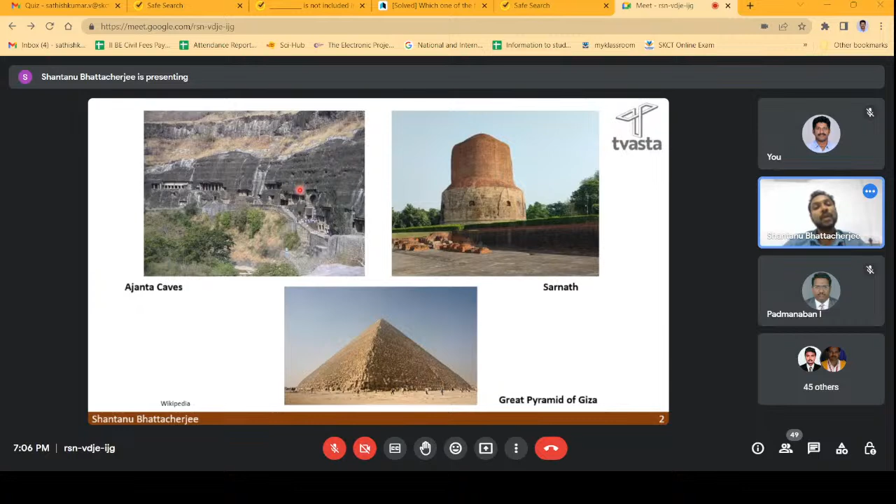The main concept which differs Ajanta caves from Sarnath or the Great Pyramid of Giza is that in Ajanta caves you have to get the materials out from the cave. We can also compare this with something present in Tamil Nadu, the caves in Mahabalipuram, the same kind of thing where stones have been carved out and sculptures were made.

Then comes a very interesting question: how were these great structures constructed at a time when there were no machines or very little energy available? There were different methods used, and interestingly, the scaffoldings, the formworks, and the way ropes and pulley systems worked for RCC or normal construction methods today were still existing when the pyramids were constructed. So basically, the core of stones and the formwork system is still the same in practice as when the pyramids were made.

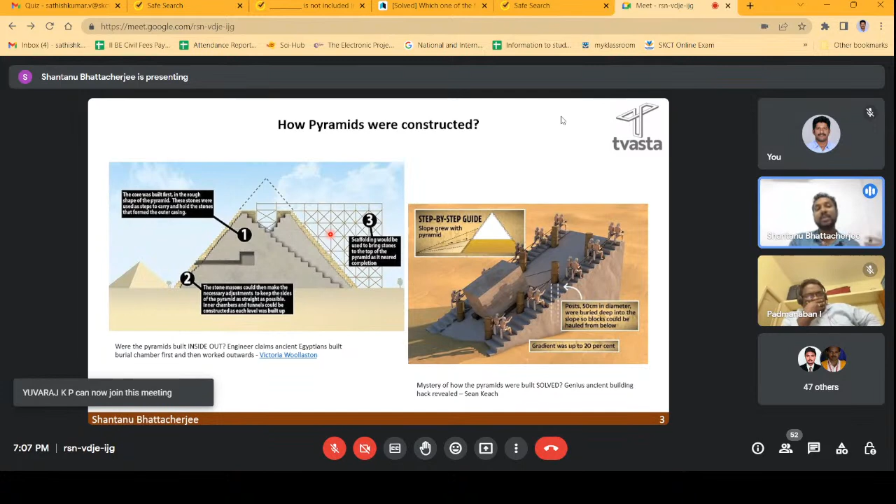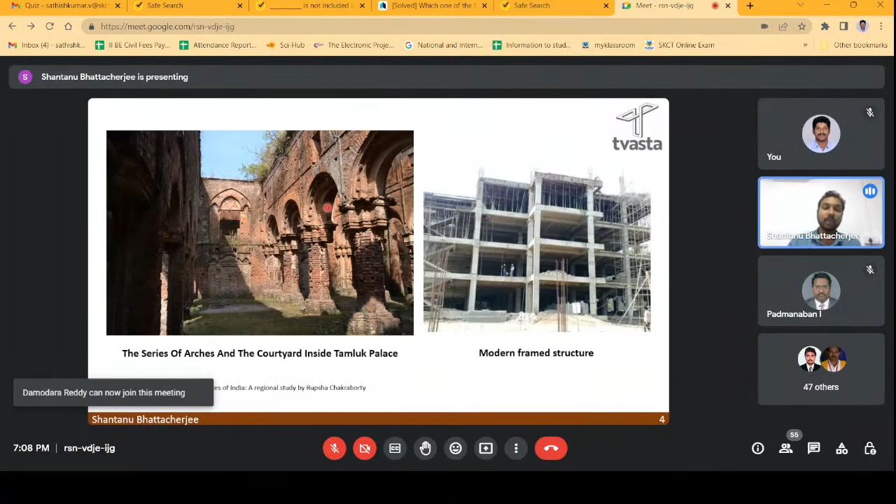Then we'll show some interesting things, like how the structural system changed when we went towards having arches - the brick arches, the brick masonry constructions, where RCC was not yet a part, and we still used to make good mansions and good houses with only bricks and blocks, using geometry and structural engineering as part of it.

Then we came to the era of modern frame structures, where we started making beams, slabs, columns, and RCC, and the whole construction scenario changed. Now we could make taller, wider, bigger houses using the modern frame structure. But one thing remained the same - what was there at the time of the ancient pyramid of Giza is still the same. We still had the formworks, we still had the scaffoldings, and nothing changed the way construction used to happen.

I'm not saying the machines were new that came to construction - there were new ways to do construction. But the scaffoldings, the formwork system, the basic skeleton was exactly the same. And there comes the most interesting part.

How much formwork is actually needed for construction? So the formworks that we make - interestingly, 20% of the total cost goes for formwork material cost, and 34% of the total construction cost goes for formwork labor cost. Only 46% is for the concrete, rebar, footing, placement of concrete and such things. So a total of 54% of the cost is taken just for formwork material cost and formwork labor cost.

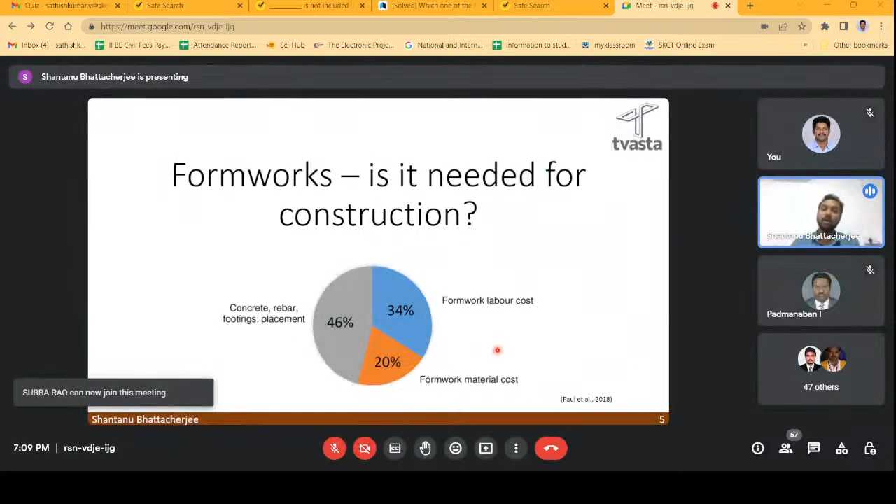And one thing we can't count here is the time. You need 1, 2 or 3 man-days to create the scaffoldings and formworks, and then another 2-3 days to remove the whole thing after the concrete gets set. So the stripping of the formwork again takes a longer time and is longer, labor-intensive work.

For removing that, some technologies came into play. One is conventional shuttering has moved to Mivan technology, where you have the whole shuttering together and then you just put concrete inside it. That's how the conventional system has been changed a bit into another formwork system that can work well.

But there is a chance where 3D printing gets in. 3D printing talks about no formwork construction - meaning while having the structural systems integrated into the building itself, we want to move away from needing formwork and scaffoldings to construct. It might be 100% removal, or even 80 to 90% removal of the total formwork and scaffoldings while the construction is happening in situ, not precast only. There's a difference - in precast, you just have to move the molds and put it there, but for 3D printing we don't need that.

So we'll glimpse a small talk about what is automation in construction. I hope my animation is visible there. Yes sir, visible, sir.

This is the next era of construction. So when we talk about Tvasta, when we talk about BTCM, Building Technology and Construction Management of IIT Madras, what we are actually looking at is changing the construction scenario - something that hasn't been worked upon for a long time, and how disruptive the industry can be. And how interesting it can be for people who think civil engineering is the same old boring stuff. No, we are not in the same old boring stuff - we are trying to make our construction smarter, faster, efficient, and use a lot of modern technologies.

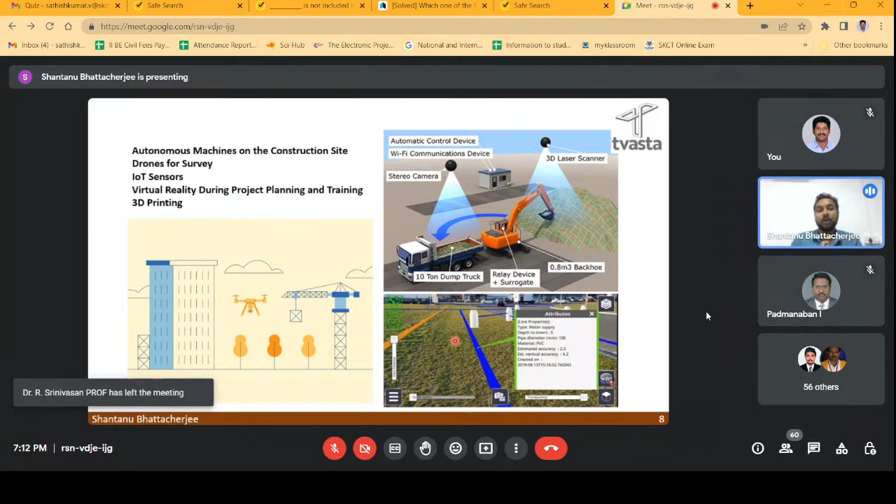And the end comes 3D printing. How is it all together, how can we talk about it? I'll go to a very famous diagram by BCG analysis - it talks about what the future holds for construction. So this is what we have.

We start the life cycle from planning to operations, and what we have is basically four major things which are going to change construction forever. One is user interfaces and applications - we've been talking about big data and analytics, simulation and virtual reality, mobility and augmented reality. All these things are in labs and somewhere in practice, and again these all come where users can see the buildings better without having to construct them. Then we have BIM and ubiquitous connectivity and tracking systems that help us track or manage the things.

Then comes the next most important part, the digital and physical integration layer. For making a car, you have robots. For making even textile, you have robots. But for construction, you don't have robots. That's where additive manufacturing actually gets in, where 3D printing actually gets in - it's also called additive manufacturing in other terms.

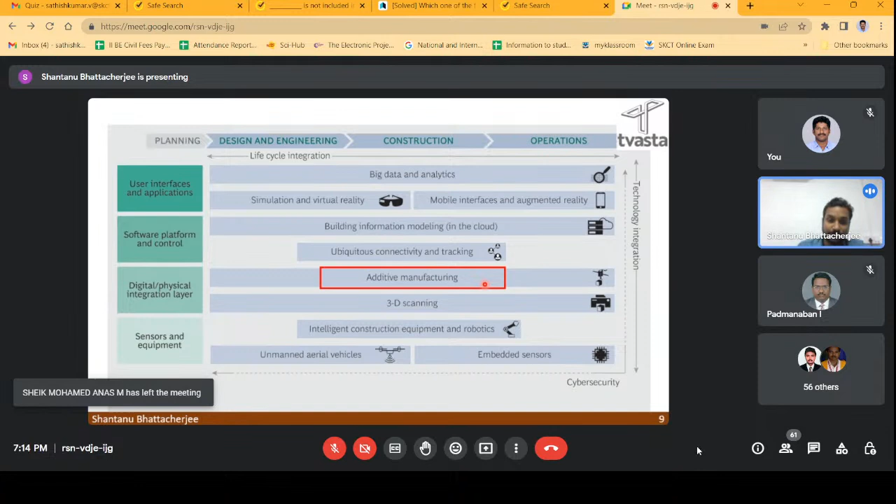Robots are getting into construction, and we are integrating a lot of software systems, a lot of high-tech trends to create houses. So intelligent construction robotics with sensors and all these things are getting added.

So this was just a starting introduction on how concrete 3D printing developed and why it is important. Now I will talk about what concrete 3D printing is and what we have done, and then we'll go into some material related technical stuff.

First, a simple difference between additive manufacturing and subtractive manufacturing. In subtractive manufacturing, you take a material, subtract from it, and create an object. In additive, you take the binder system, add it together, and create an object. So the main benefit is that waste can be reduced a lot.

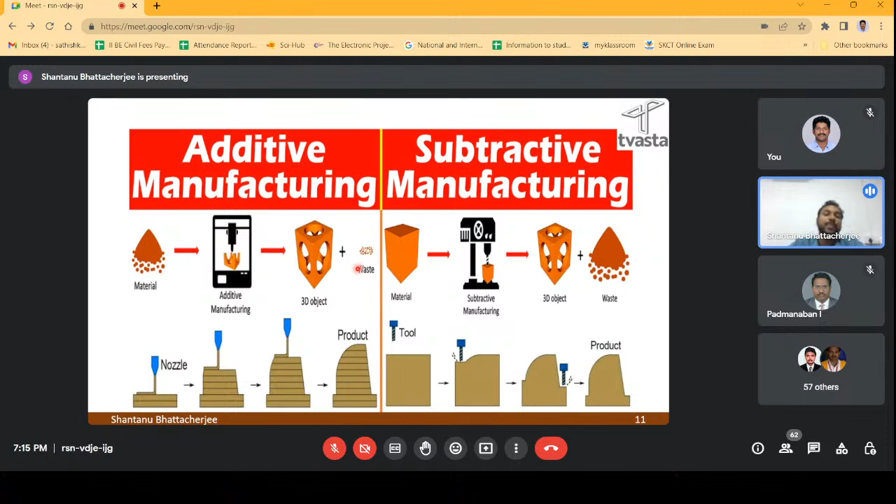So you will say, okay, this has been done in the civil industry for a long time, correct? For blocks, for bricks, for other things, we have been doing it for a long time using molds. And there comes the change.

How concrete 3D printing happens is that we have a robot running and creating layer by layer construction of wall systems, columns, walls, and other systems, and you don't need formwork at all — it just comes up together. So that's how the actual printing happens. It's a primitive process.

When we started, we had this kind of printer, and there are four main parameters which become critical for governing the 3D printing. 3D printing is like a micro factory, so you have the automation or automatic control of the robotic machine which runs through the process.

You have pumpability, or a pumping system which needs to pump the material to the hopper or the auger system. You need to extrude it, like the extrusion system used for brick manufacturing, cold bricks and similar things. Then it needs to build in that fresh state to enough height so it doesn't collapse, buckle out, or bulge out.

There comes the most interesting part. We have been habituated to create self-compacting concrete, habituated to create pumping concrete, but always with formwork. We put the concrete in the formwork, forget about it, come back after 1 day for a column or 7 days for other things, strip the formwork out, and our concrete is ready inside.

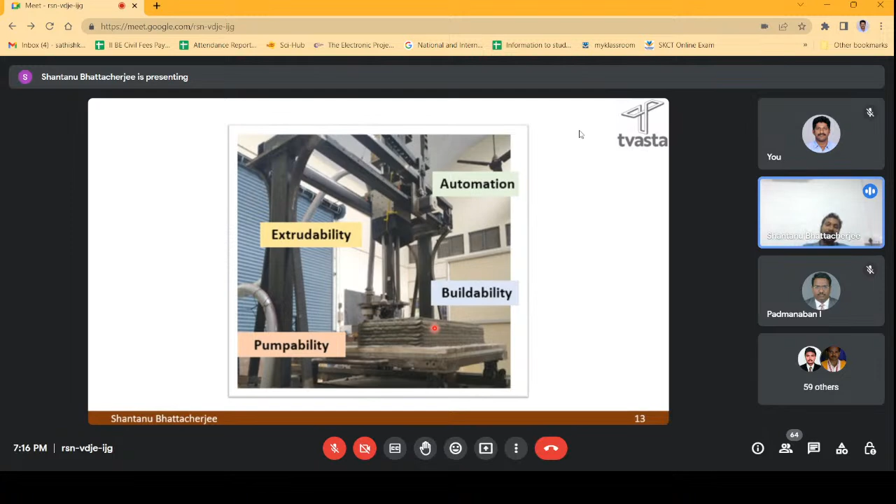The mold was there. But here, the concrete has to stand from day zero, from hour zero. The moment it starts printing, it has to stand there and it cannot collapse. That's where the change actually starts. So how does this happen?

There are different other forms of 3D printing also. This is called smart dynamic casting, where again you have a mold and the concrete has to stand on its own on the column while it is getting printed.

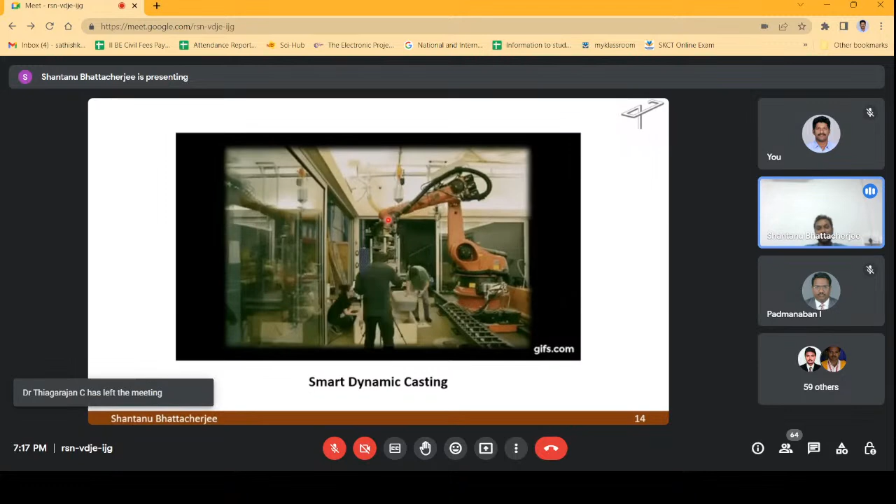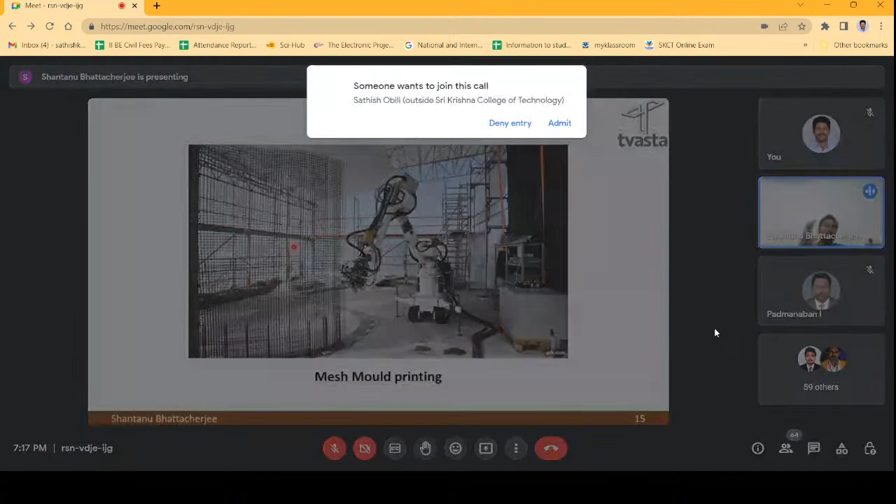There's another quite famous approach called mesh mold printing, where you create the reinforcement using robots and then shotcrete the concrete inside like a ferro concrete or ferro cement, and then a robot comes and does the final finishing.

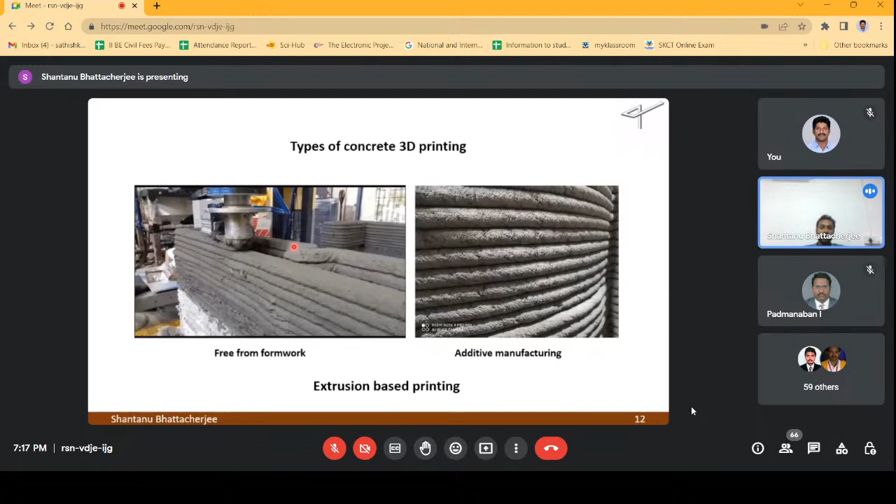Out of all this, the extrusion based system is the most famous and is being used for large scale production, while others are still at lab scale. So we come to what exactly is being printed.

These are 3D printed structures. This is the first 3D printed house of India, the first finished 3D printed house, which is in IIT Madras. It was done in 21 days, and it was more like a students and startup project where people were not equipped enough. So now we can have this in 7 to 8 days, we can achieve this scale of construction.

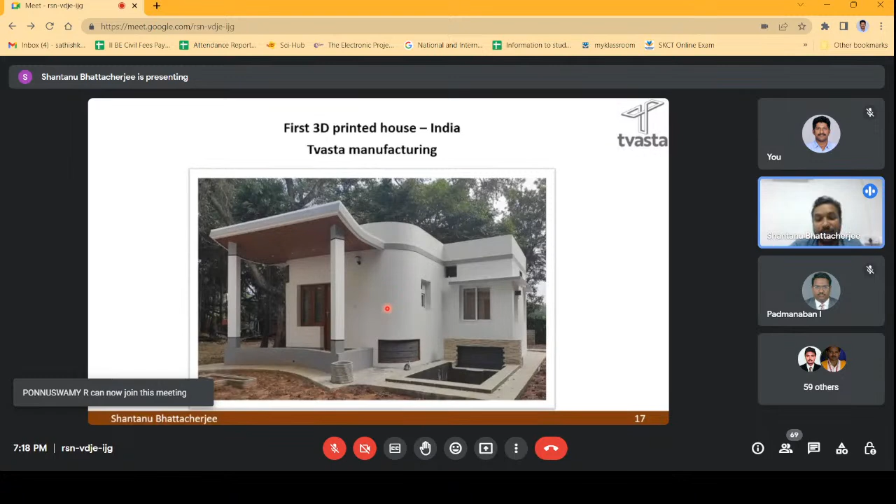It was done off-site, in factories, printed and moved to the site, assembled and finished. Similarly, L&T has also constructed 2 houses in Kanchipuram using 3D printing. The only thing is that the technology Tvasta has is completely made in India, from robots to the material to the machine and everything.

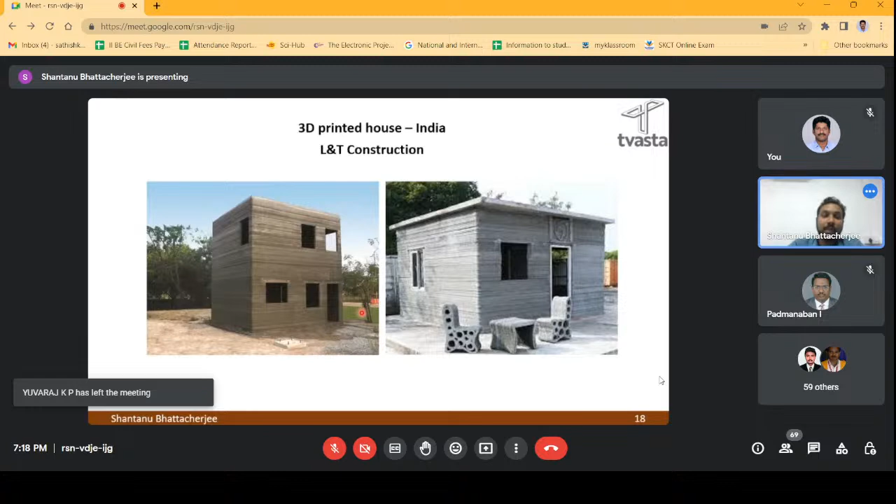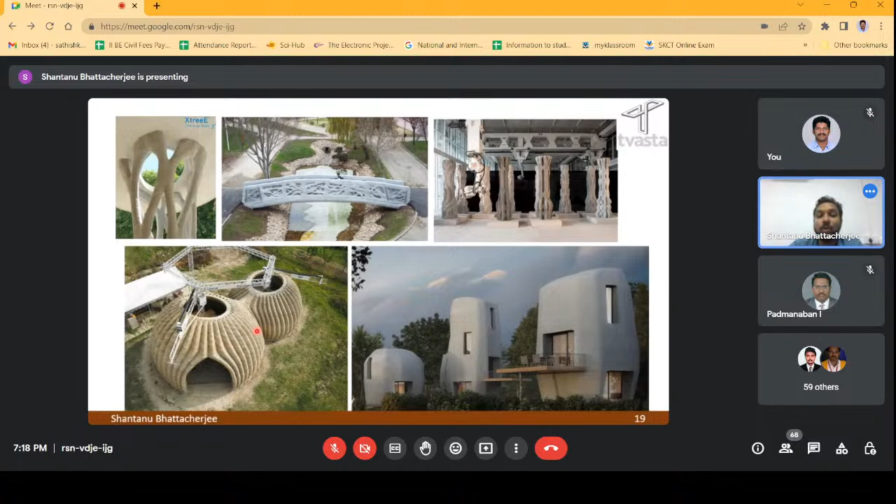In the world also, there's a lot happening in 3D printing. You can see beautiful columns, small culverts, bridges, and houses in the Netherlands, and WASP is printing with clay to create sustainable eco structures where people can live. At ETH Zurich, people have printed a whole house called the DFAB house using 3D printed elements with walls, roofs, slabs and everything. So each component can be printed with 3D printing without any issue.

What exactly more can be done?

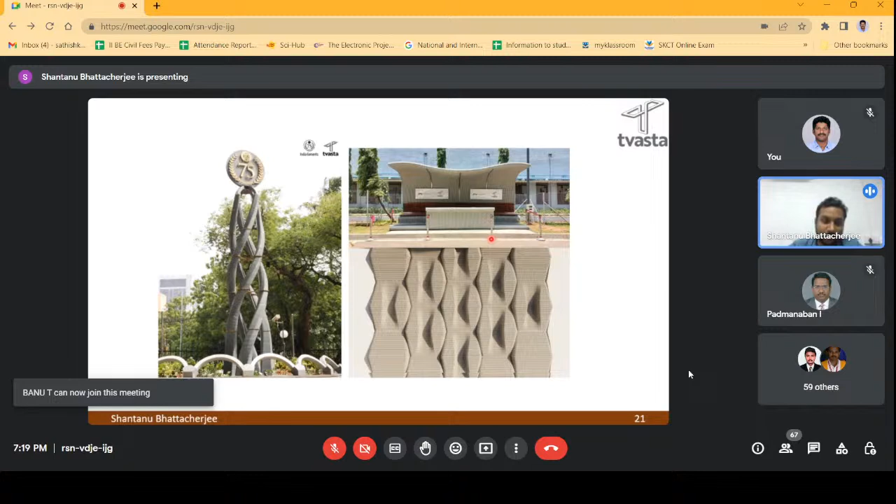You see the bus stop here, the Godrej bus stop, with this beautiful curvature that was done with 3D printing. 4 modules were printed, stacked together on site, and the print was finished within 10 to 15 days of starting the project. To do this kind of curve with cement or concrete, you need a huge mold system. For 3D printing, you don't need anything, you can just print it within 1 day. We can print one full quarter of the module, and with larger printing systems, we can print the whole structure in 1 day.

So how big can we print? There are machines, and you might ask, these are small modules, but how big can we print? Can we print houses on site? This is the printer that Tvasta has in Chennai, near a facility near Maraimalai Nagar. You can see the people here for scale. This printer can print up to 10 meters, so a 10-meter height building can be constructed continuously. We also have smaller printers which can print 1-story or 2-story houses.

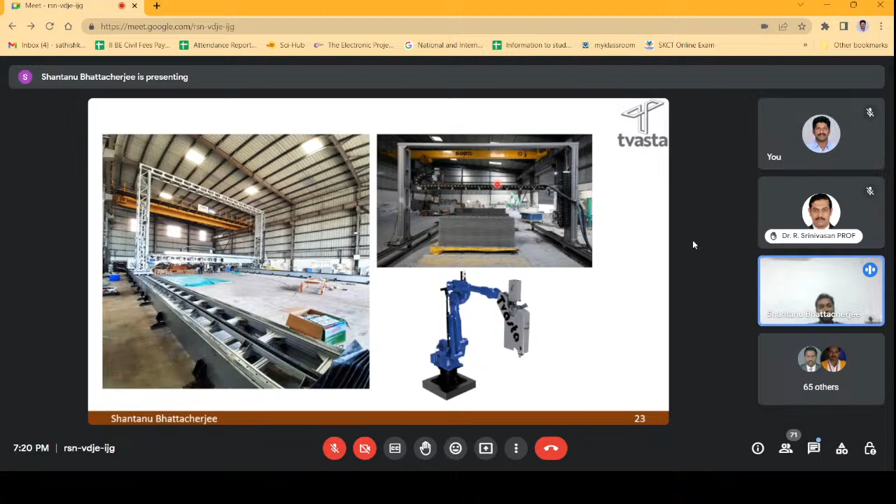We also have robotic arms that can print with polar coordination. Apart from that, the scale of printing that is possible is enormous. Even L&T is working on creating a G+2 or G+1 structure. We are working with IIT Madras to create the first G+1 structure there, which will architecturally have both off-site and on-site construction together. There's a lot you can construct very fast with this technology.

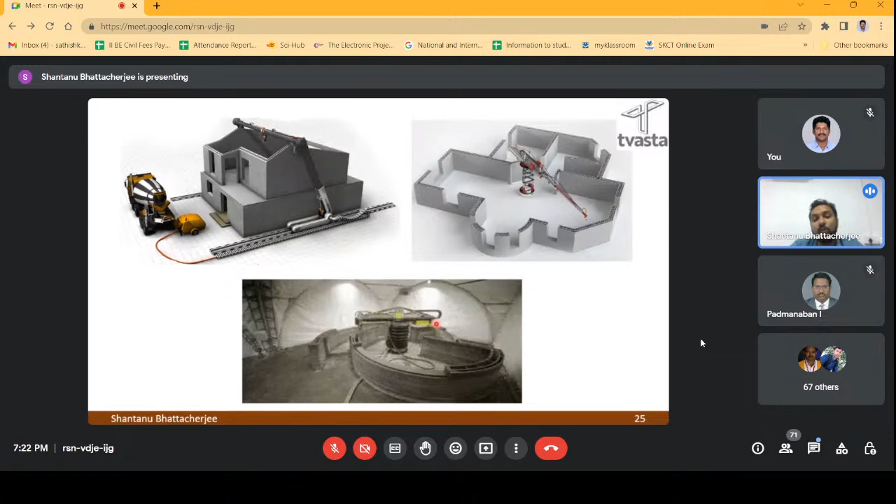Now I will go a bit towards the technical terms and understanding of how this 3D printing works. Here I am showing you 2 different photos. This is a gantry system with rails in it. The rails can move, so you have a pump system and an RMC truck or a normal truck with 3D printed concrete. It can pour directly into the pump, which pushes the material up to the nozzle, and with the nozzle you can print and create the whole house. This is a crane system, where you have a boom and a crane and again can print around in a circle. It works more like a crane you've seen for normal construction to lift weights, but instead we can print with it.

If we go into more detail, we can break the whole component into 9 major parts. The first is obviously the computer, which you need to design the tool path and generate the G code. Generating G code has become much easier now because of open access tools. You can give a CAD file, and it will convert into an .stl file. Software is available both from companies making robots, like Tvasta or Mica, and as open source, where you give a CAD file and they make the printable model, the .stl file. It's very easy to do now.

Next is the robot controller, for reading the generated code and controlling the robots. Here comes the main part, where this G code and the robot are integrated, and this is what we call the physical and cyber integration.

So whatever drawing, the CAD files or BIM or whatever you have been doing in the computer, the robot can actually do while printing itself. So any structure, any shape can be printed through.

The third thing is this extrusion nozzle. That is very important, the robot for moving the extrusion nozzle, because we have robotic arms, we have gantry systems, and it has to have a minimum capacity to move here and there and have the printing.

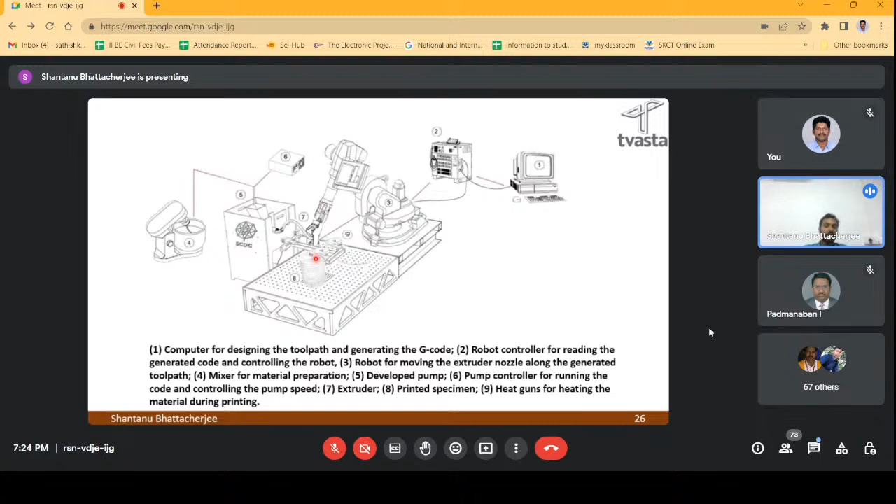So the ink itself has to be different from whatever concrete we are habituated with, with pumpable concrete, whatever IS code, IS 456 says, or whatever the new IS code says. We can't move with this concrete, and that's why we have a new kind of concrete in the field called printable concrete, a 3D printable concrete. We are working on the BIS code or the IS code, so that we can create a guideline so people can actually print it, people can actually test it, and they can use that guideline to have a minimal understanding of 3D printing.

When we go further into the system, how does a CAD model or a model get distributed so that it can actually be printed? When we give a CAD file, three things have to be done. One is the FEM analysis or structural analysis, to find out whether the structure is stable or not. Then we integrate that with the BIM model, or building information modeling, and then we have the material designs and properties that have to be fed in.

Based on that, what we create is a topological analysis, or a file that can be further exported as an STL file. The slicing is done - slicing is nothing but, once you have a circle or a cylinder, the printer needs it as slices. So it basically extrudes, in the sense it creates a 2D model and keeps going in the third dimension. And the third dimension doesn't need to be straight, it can be any angle, any turns and any curves. So the slicing is done, and then each slice is converted into a G-code, which again needs some data analysis and optimization processes.

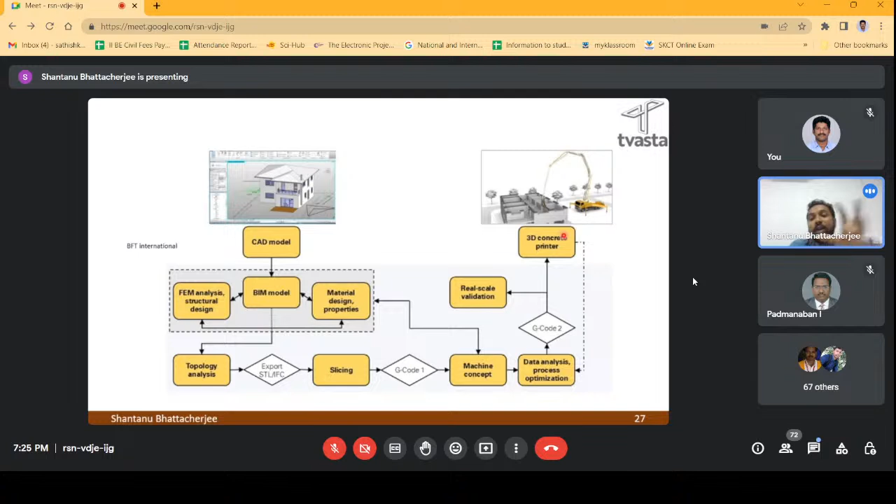From that, we go for creating or printing the whole structure, and the concrete printer is controlled - that's how it works. So when we go further and talk about digital concrete or digital construction, it's not limited only to extrusion-based 3D printing. So we divide it into two things: one is no formworks, and the other is non-conventional formwork systems.

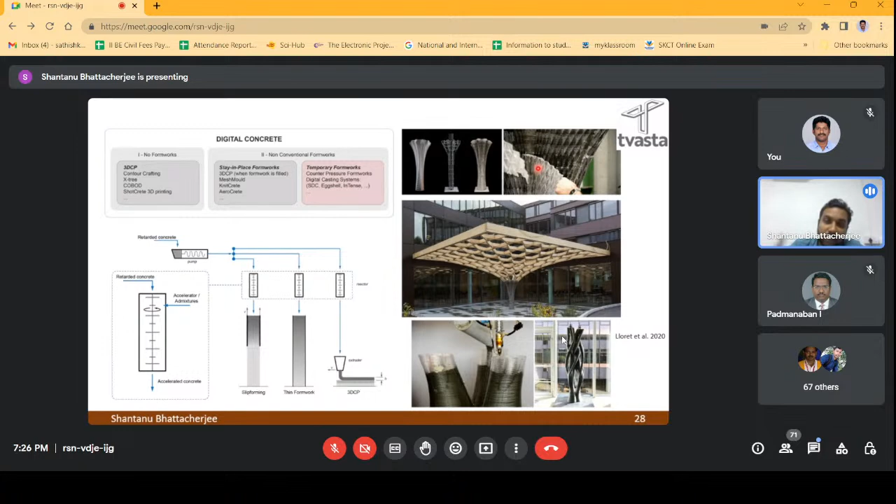In no formworks, we again have the same thing - we do the contour crafting or these things. Then we have some people who have been working with something called stay-in-place formwork, where you print a polythene formwork outside, and you fill the concrete inside, and then you just remove the formwork. The formwork can come out like an eggshell. So we are not talking about that, it's just a glimpse that is also available.

Now we'll go a bit deep into the material science. How does the material science, or the material parameters that are important, work? The first thing is how does the printed element, when it is being printed, fail? There are two basic mechanisms behind this.

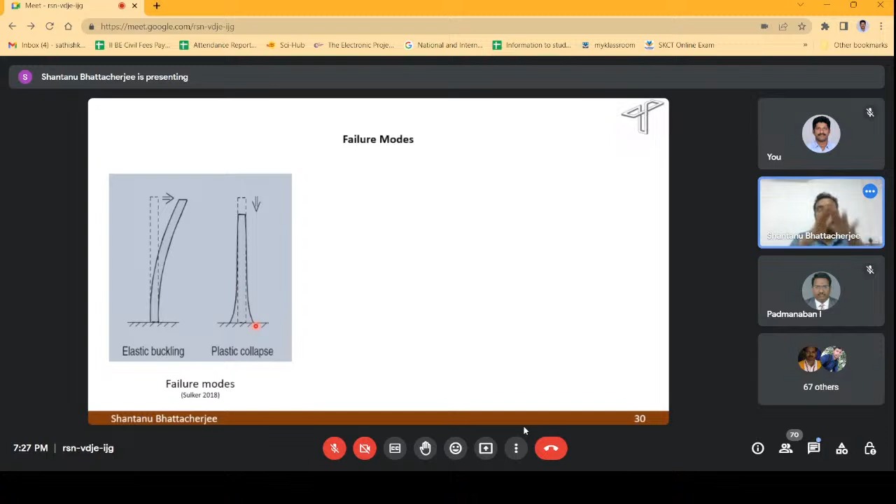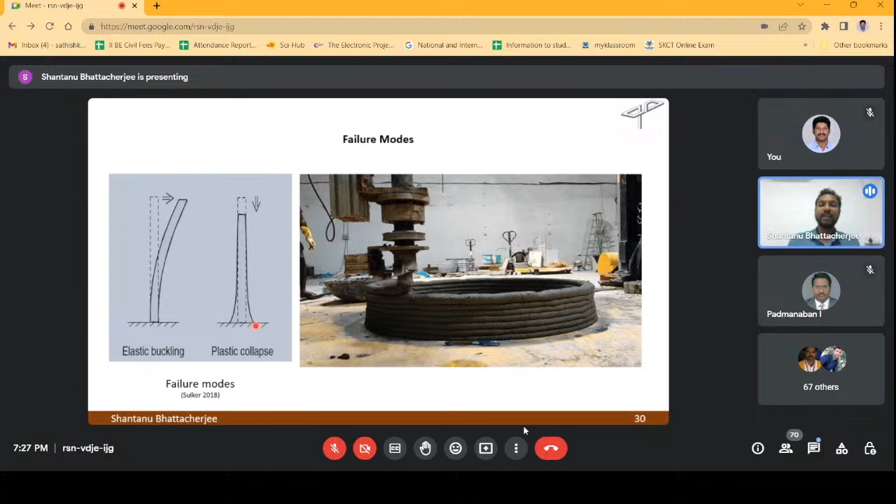One is your elastic buckling, or buckling. We don't use elastic-plastic, but we generally consider it as elastic buckling, and we do a calculation as per that. Then we have the plastic collapse of the structure, where the layers will break and the whole structure will fall. So you can see this - this is very initial, when we print something, and there are cases where it just fell down. You can see that it buckled out, or it fell down.

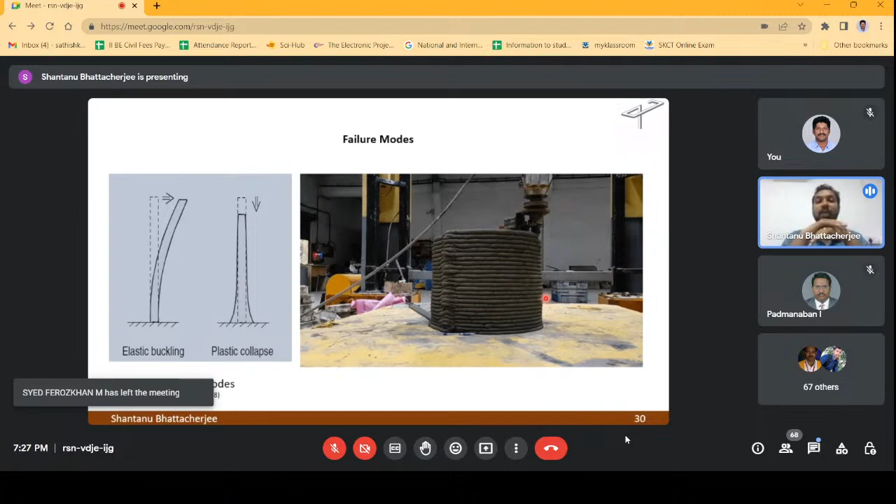This is another failing where you print it continuously, and you can see there are small deviations happening, and this is how the bulging or buckling happens. So you have to understand two things: a printed structure needs to actually print properly so that it can hold, and it should not fail like this.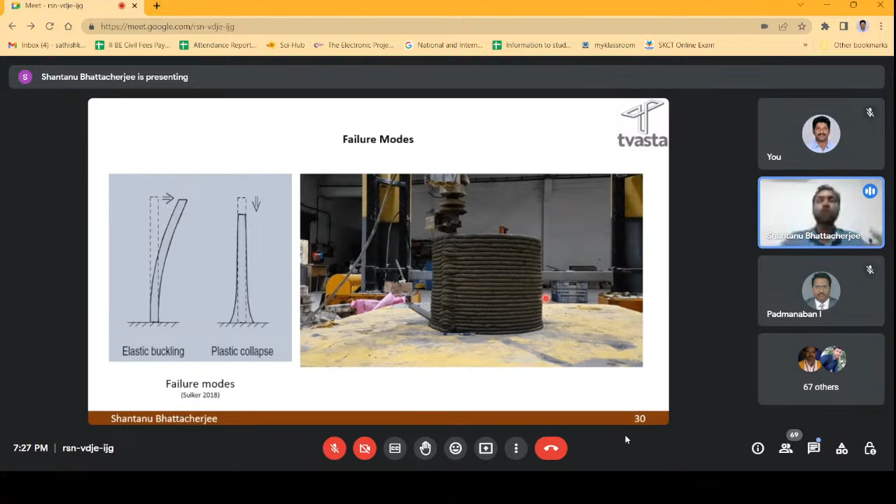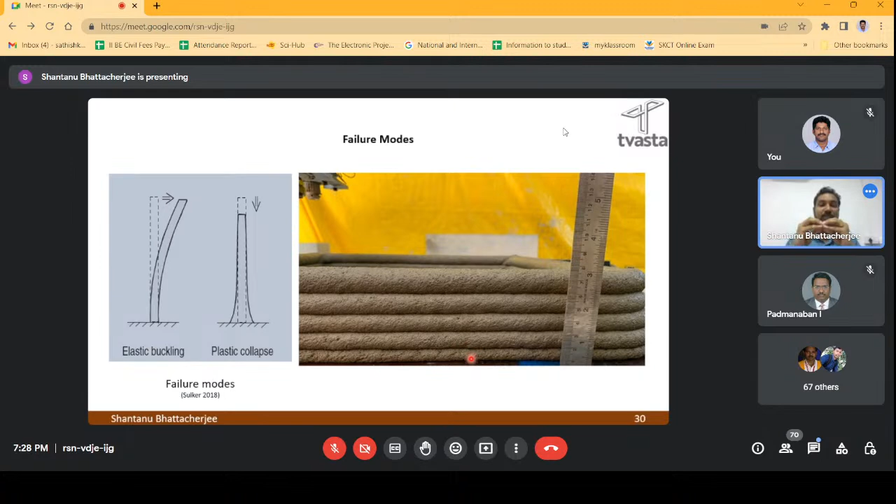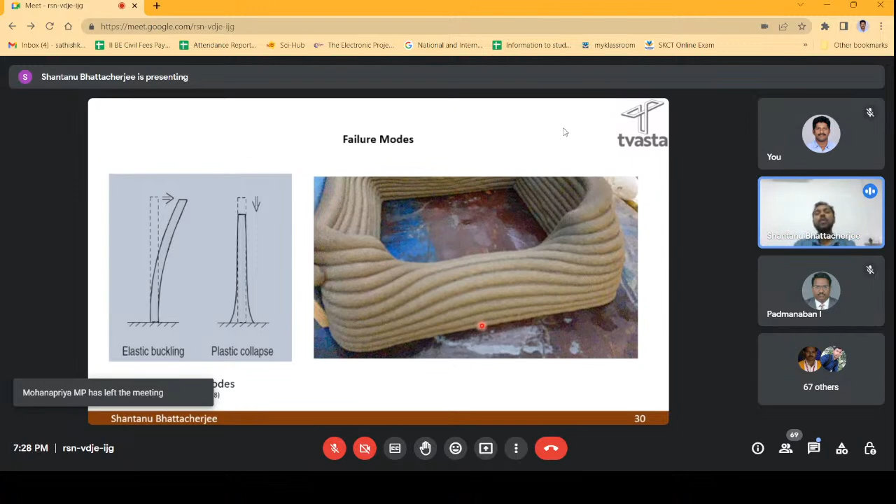There are two basic mechanisms that come into play: elastic buckling and plastic collapse. In plastic collapse, the lower layers sometimes get compressed too much, and the whole structure becomes like a trapezoid because the lower layers are getting compressed and it fails. Then the structure falls like this and just collapses. So the whole material science we talk about is about how we can allow printing without any kind of collapse. This is where the collapse happens.

So we'll go deep into that, like how to actually have it in the fresh state when it is being printed so that it doesn't collapse.

But before that, we have to understand there are a few parameters that are very important that influence 3D printed concrete's behavior. The first is the mix design. We call it a multi-level material design, and it's being quite widely used by people.

So SCMs, VEA, superplasticizer, and different kinds of chemicals are used. Different mineral admixtures and chemical admixtures are used to get the rheological behavior. Again, rheological behavior doesn't mean you need a rheometer. Rheological behavior can also be easily examined using a slump, a flow table, a compactor, or anything.

Then you have to understand delivery and placement, and tribology. Tribology is about how the layer forms. When you push the concrete through the pipe, a layer forms between the concrete and the pipe that actually helps the concrete move forward. This layer is the main thing that helps the concrete get pumped.

When my concrete is like an SCC, I don't have any problem because it always moves like water. But when I have a stiff concrete required for 3D printing, I only have the layer surrounding the material and the pipe that can do that.

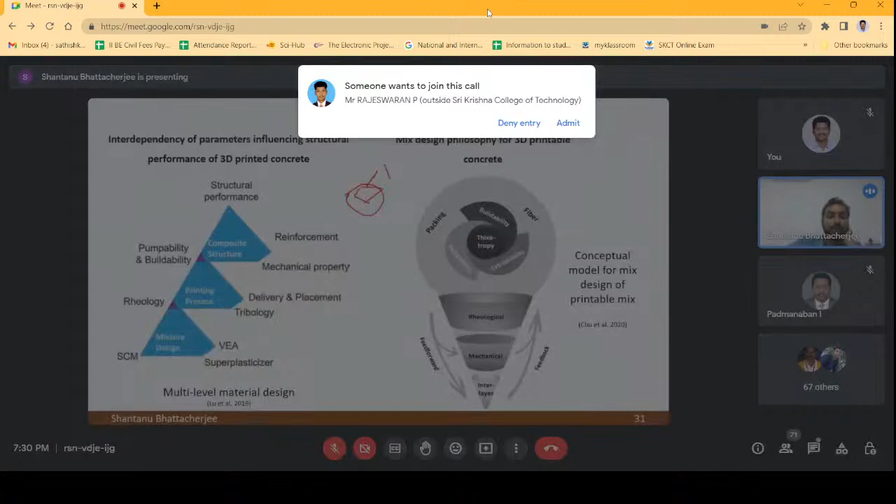So if I make it, if this is the pipe and I have concrete material going through inside, this zone is where the tribology comes into play. So tribology becomes important for this. This behavior is what governs the pumping of the material.

Now, how do we study that? Most of the rheological tests that have been done, the tau, the shear yield stress, and the mu values we find out, actually work to find out how this layer, which we also call the lubricating layer, because it lubricates or flows the material, how it works. And we have some relation for that.

Now, it's not like if you don't have a rheometer you can't make a 3D printable concrete. Believe me, we have been working on 3D printed concrete without having any concrete rheometer as such. We go with basic tests like slump, flow, flow table, and all these things, and we find out the parameters that are critical for pumping and so on.

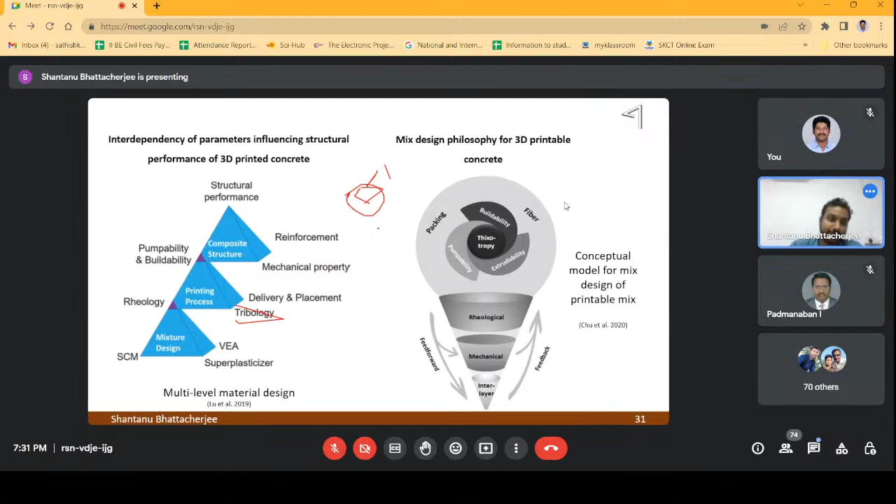Now the other important things are pumpability and buildability, then mechanical properties, and how to integrate reinforcements. These three things are again controlled by how well we are packing the aggregate.

So when you make a concrete mix design, there are two ways to do it. One is that you follow the existing guidelines and codes, and you make the mix with that: this much aggregate-binder ratio, this much coarse aggregate, this much fine aggregate, this much water-binder ratio, and you make it.

The other approach is called the particle packing approach. What happens in the particle packing approach is you basically try to have all the dry materials together, create a sieve analysis, that particle passing graph, and plot it to create an S-curve.

If you remember, you're working with it every day, so we have to create an S-curve. An S-curve gives a perfect packing—that's what we call well-graded materials, uniformly graded materials. So we always try to have well-graded materials, well-graded sand. That is better for us.

So this particle packing is very important, and the better the particle packing we have, the lesser the water-to-binder ratio we can go with. With that, we can gain good strength and also get other properties. So packing becomes a very critical thing. Designing by packing or particle packing is the way concrete design should be, how concrete design in the future should look like.

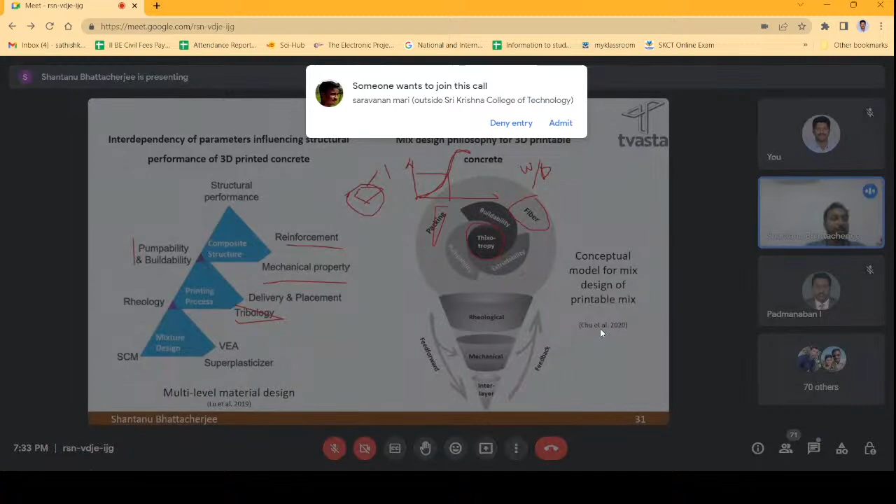All this comes down to a term called thixotropy, which is affected by both packing and fiber density. Thixotropy is the behavior clays give - once you put it into shear, you break the chain, it rebuilds back, and it can hold its place.

If we look at it inside a funnel, which is a conceptual model used for mix design of printable mix, we have rheological properties controlled by this basic behavior. That's why I'm saying you don't need a rheometer - if you know how to do packing, how fibers work, and how thixotropic the material is, you can measure it in different ways and actually make a rheologically proper material that can be printed.

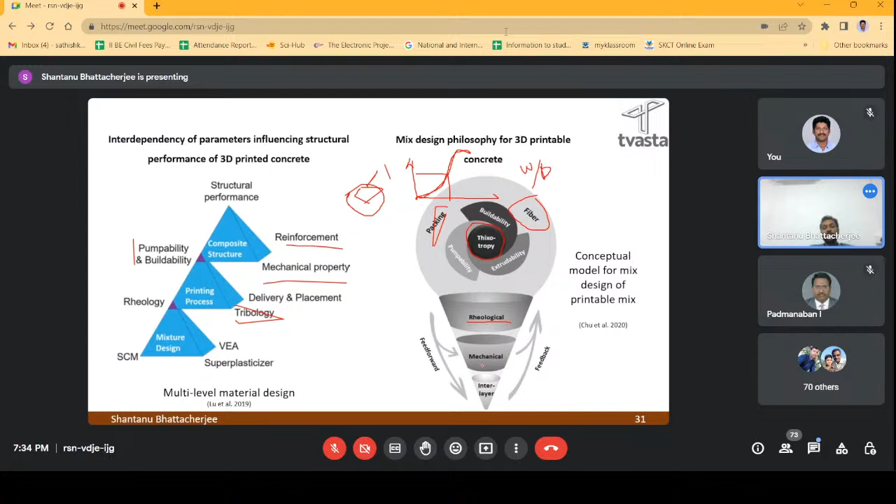Then it is further taken for mechanical analysis and interlayer bonds, which I will talk about in the coming slides.

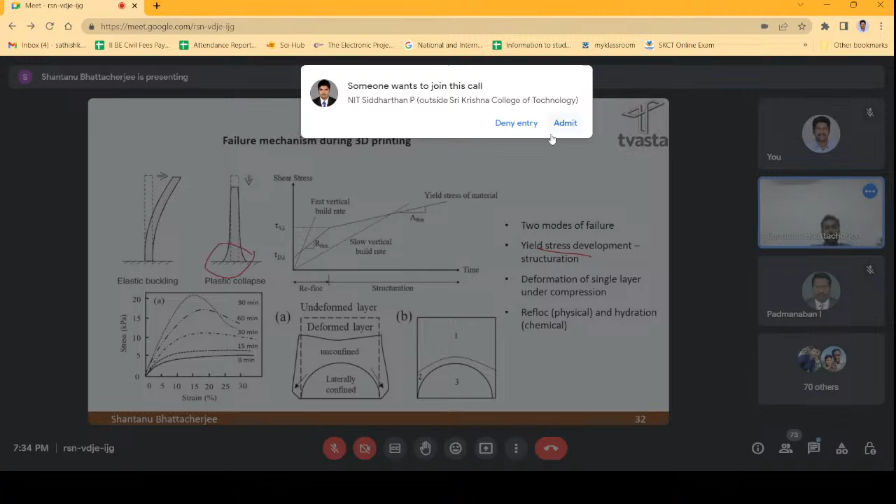So how does this failure mechanism actually work? There are two modes of failure. In one, you have yield stress development, that is the plastic collapse. What is plastic collapse? It's when the shear stress coming in is greater than the yield stress.

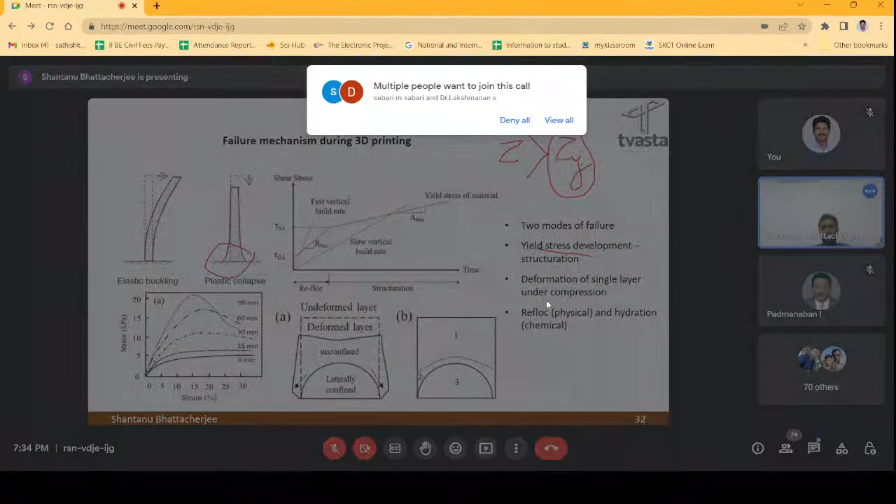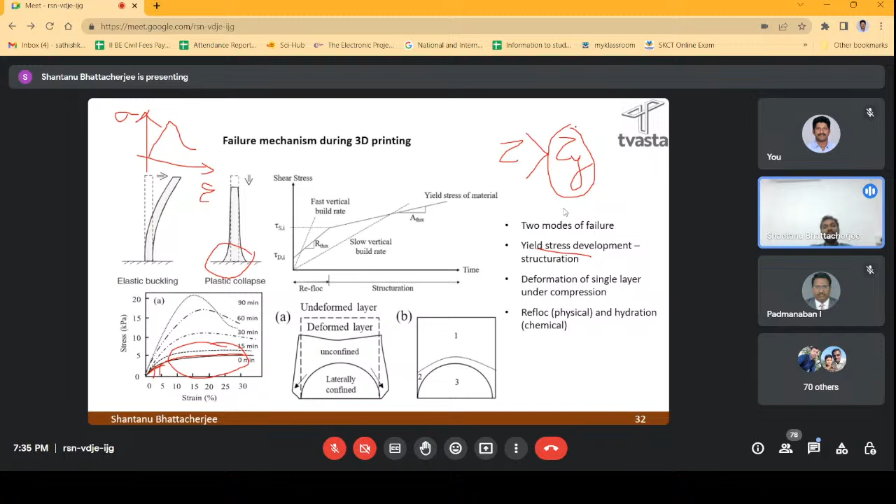Material can only stay as a solid until it reaches its yield stress. The moment yield stress is reached, it starts to behave like a fluid, or plastic deformation occurs. Even in hardened concrete, you have a sigma versus epsilon behavior, but in the fresh state of 0 to 30 minutes, the stress versus strain behavior is different - this is the plastic region. We don't know exactly where the plastic region starts, but the material moves from the yield stress tau y. When the applied stress is greater than the yield stress, the material starts to behave like a plastic mix.

People have studied how this shear yield stress develops with time - can you change the rate of printing so you don't get a collapse, or a plastic collapse? Then the question comes: how does a single layer deform?

This is how a single layer deforms. This is an undeformed layer when you're printing it, and with self-weight or the coming weight on top, the layers deform to form a structure like this.

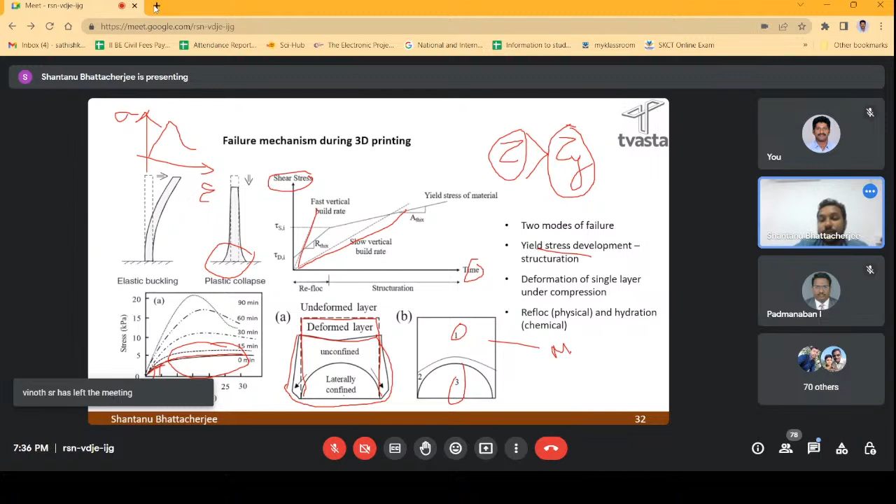This can be divided into three parts: one is the unconfined part, then you have a laterally confined part at the bottom. This means the mechanics of material is different in this region - one is an unconfined case, the other is laterally confined.

Here you have sigma x, sigma y, and sigma z all giving compression, whereas in the unconfined region you only have sigma z giving compression, with no sigma x or sigma y. When something is confined from all three sides, we have a hydrostatic pressure case, and in that case we don't get deformation - so this part won't deform much, but the upper part will.

The same applies to a part where there will be biaxial stress - either sigma y and sigma z will be present, or sigma x and sigma z will be present - which leads to deformation in the second part. This matters because understanding each layer's mechanism helps us know how to have a layer without it deforming. Either the whole layer is under triaxial compression, so it won't deform, or we have to satisfy the sigma z criteria, where sigma z should be less than the yield stress so we don't end up with plastic compression.

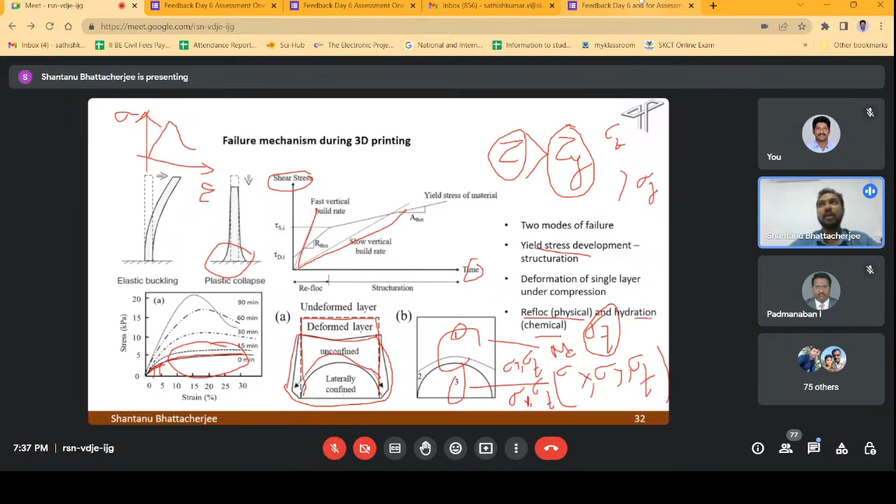How we can control it through the material side, we can either have a physical reflocculation or a chemical hydration. In chemical hydration, you add accelerators and other things that can improve the behavior of the property of hydration, and it will make a fluid into a solid thing.

In the second term, the reflocculation, a clay kind of behavior happens, where once you mold the clay it is moldable, and when you keep it, it becomes solid. The reflocculation happens, and it also helps in increasing the buildability or shape stabilization of the printed layers.

But what happens when we actually print with a lot of different materials or a lot of different time gaps? Time gap is the time difference between two layers that is getting printed. This time gap is very important.

If we decrease the time gap, you can see there is a very beautiful bond between these two parts. But when you increase this time gap too much, you get very bad bonding. You can see these big gaps forming when the time between two layers is too much, or the material has very high elasticity or very rapid setting.

Before you can put the next layer, if this layer sets - now you know what setting is - if the layer sets, it becomes solid. And when the next layer comes, there won't be proper bonding between them, and you can see this kind of voids forming. So the bonding, the material again becomes a very critical thing.

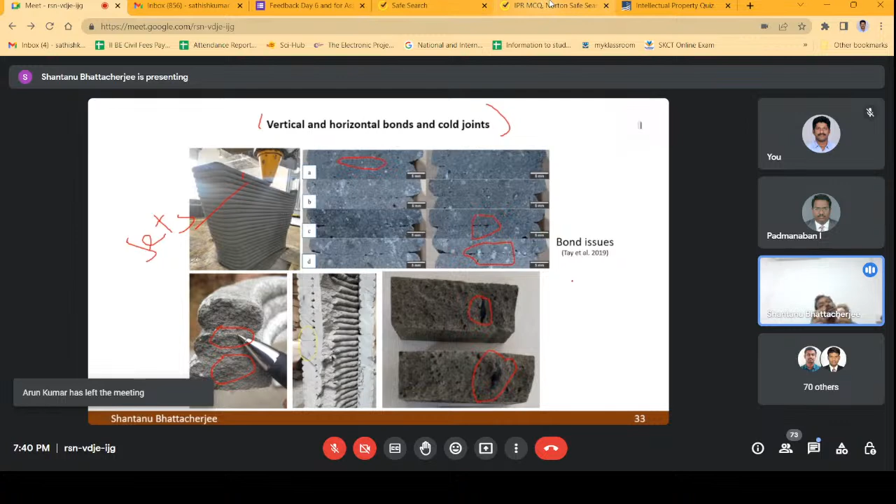That is again a very important thing that we, as material people, or as structural or civil people, have to design - we have to proportion the setting in a way that it doesn't collapse while printing and it doesn't form this kind of gaps.

The materials we use are very commonly available: OPC, PPC, slag, and we also use some specialized material for special cases. This printing is done with limestone calcined clay, which is quite in the news, and IIT Madras has done a lot of work on that. There's another sustainable cement coming into the market, limestone calcined clay cement, that we have been printing with. Then there is calcium sulfoaluminate cement, or CSA, which is again very popular in China, but in India we don't have a source.

It's a very quick set, rapid hardening cement - you can get the 28 days strength in one day. One day you can get a strength equal to 28 days strength elsewhere when you use CSA. But unfortunately we don't get it much in India, and even for studies you have to get it from China or Egypt.

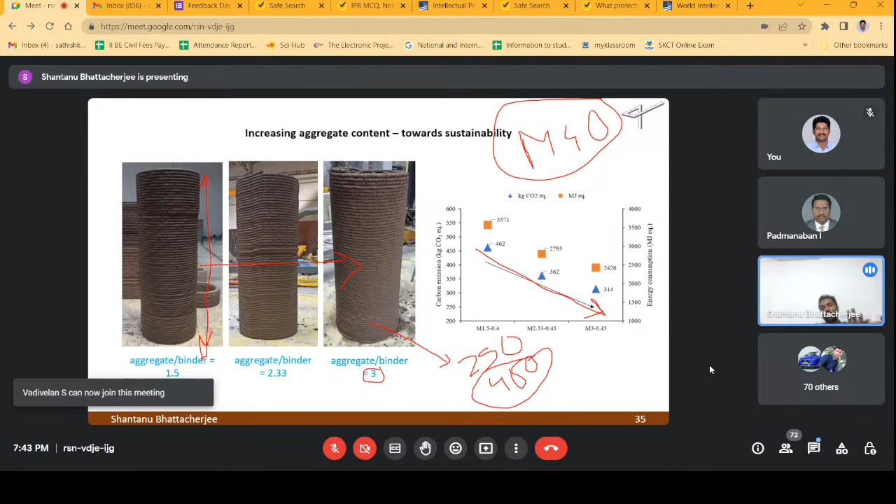So whatever we are talking about is M40 grade concrete, and in terms of sustainability we have been doing analysis, trying to reduce it further, where we have already cut it down to around 60% of what a normal concrete holds, and there is volumetric reduction as well.

So what is the future? What are we talking about? Whatever we have been discussing till now was more into the material science aspect of 3D printing, and the aspect of structures. Before I go into the future of 3D printing, I want to talk about 2 to 3 things.

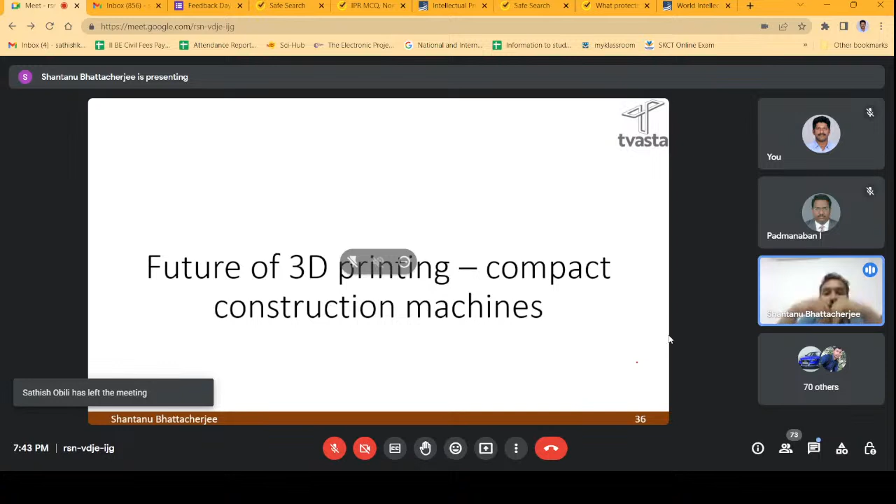I want to talk about things that still bother us, that are still open for research and understanding. One thing we are now doing is mechanical testing of 3D printing and trying to create a code out of it, an IS code which will give specifications and guidelines to do the testing.

At the same time, there is a committee called RILEM, based in Europe, an international committee where we also work. There is a study going on between all the labs in the world to find out how to test concrete which is 3D printed, what different values we can get, how much scatter we can get. So the Gaussian curve that you remember using for normal concrete - is it even possible to use that or not? A lot of research is going on there.

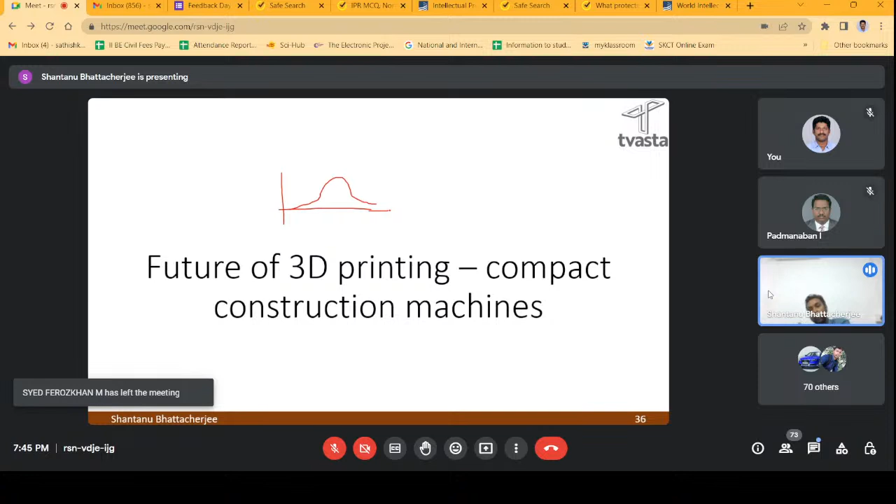But that's not the end. We are not talking about only printing on Earth. What we are talking about is beyond that - we can actually print all over, like on the Moon, on Mars. That concept exists and is being followed by NASA, ISRO, and other eminent institutes and centers working on 3D printing.

So can we actually do robotic 3D printing at places where we cannot send people to construct? That can be somewhere in Ladakh, some mountainous area where there are no laborers, an arid region or desert, or the center of a village where there is no other facility - a robot can construct there.

And then it can be Mars, it can be Moon, it can be anywhere. These are concepts that have been developed, and people are working on creating lunar concrete, Mars concrete, which can work in those environments.

So that's a small glimpse into 3D printing - what it was and how it would be. Now I have taken some time, so for the next half hour we can have question and answer. If there's any doubt, I can answer that.